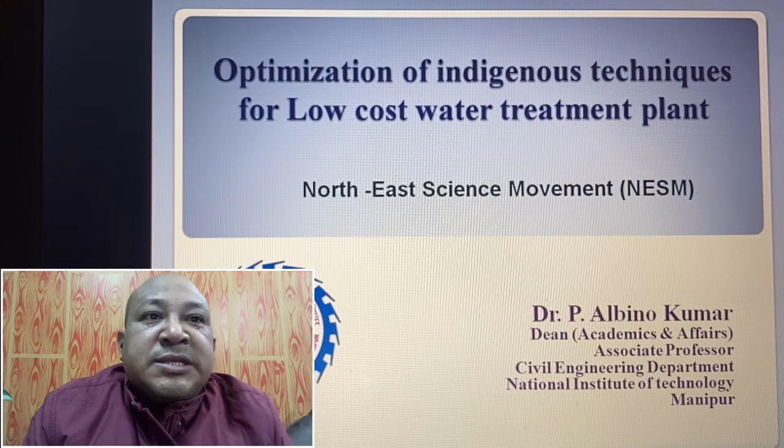To begin with, most of us know there is a water crisis throughout the globe. This water crisis can be defined in two ways. The first is when there is no water available at all, such as in deserts, or where rivers are completely contaminated or polluted. However, in some places a lot of water is available, but the water demand is more than the water available. That itself is also a water crisis situation.

As per the Niti Aayog report, more than 2 lakh Indians die every year due to non-access to clean water, causing a lot of health affecting issues.

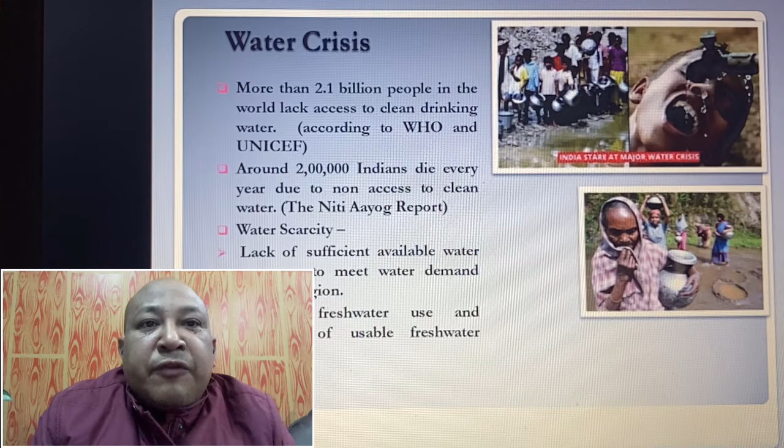Today we are going to start with what is the actual situation faced by villagers, even though many of us have come across this in real life. To make it precise, we see that the water crisis is especially due to the increase in water demand, particularly in rural areas.

In urban areas, water is always available commercially or some other way, maybe at a cost. Another factor is altered weather patterns, and then the lack of proper treatment facilities.

This is very important. In many towns and cities, there may be no space, but still proper water treatment plants exist, even though the efficiency may not be high. In rural areas, the construction of large cost water treatment plants is not very economical because the population is not very high.

So what we come across is that villages always depend on commercial water or sometimes on ponds and rivers. Sometimes, due to over exploitation of the pond, its recharging capacity decreases, and hence the pond becomes dead.

Plus there's pollution of ponds and rivers in villages, from cattle, cows and buffaloes taking baths, and due to improper sanitation like washing, drinking, bathing, and cleaning everything in the pond itself. So these are some of the issues that we've come across.

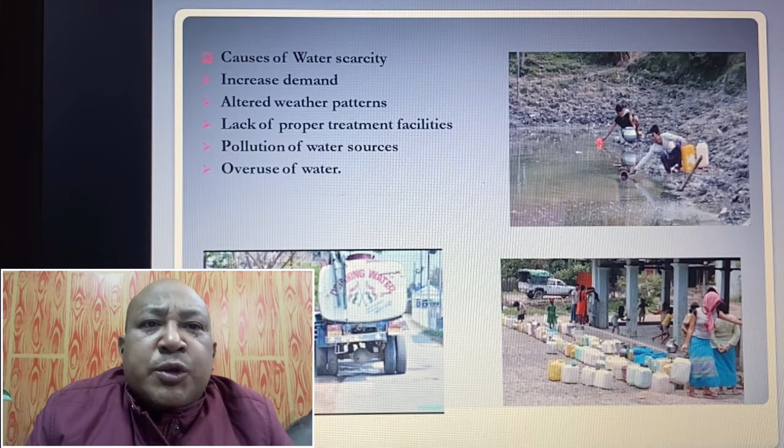In view of that, we are trying to identify some of the indigenous techniques used by our forefathers, and we are going to enhance them. We know that if impurity is there, it has to be filtered out, just like the filtration of tea leaves while preparing chai and coffee.

They used a lot of charcoal, a lot of sand particles, even though they may not have known what is better or what mechanism is going on inside, in terms of the science of physics.

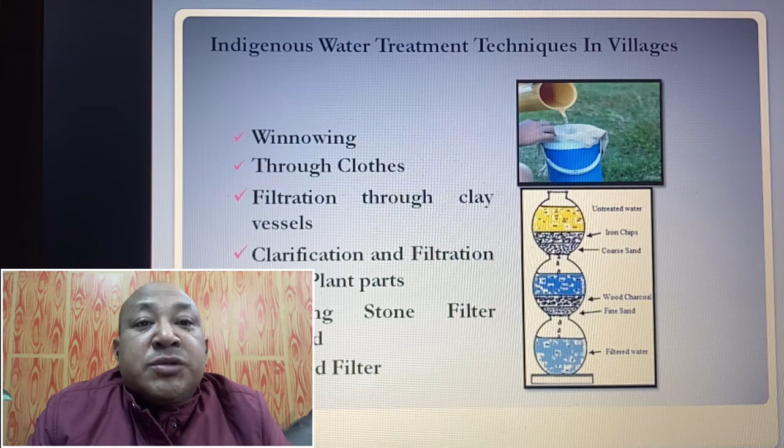So these techniques of filtration by sand, iron, filtering water through iron chips, coarse sand, wood particles - we are trying to understand the mechanism inside through available resources, and we are trying to implement this on a very large scale.

Now, most of us know that the sand filter itself is the most common technology applied everywhere for the treatment of water. That is what we call the biosand filter.

The mechanism itself has been applied using slow sand filters for treatment of water supply in many urban areas throughout the country and throughout the world.

Here, the main mechanism that lies is not only the filtration by the sand process itself, but there's also a provision called the biofilm that develops on top of the biosand filter.

For example, on top of the biosand filter, a layer develops automatically that takes around 10 to 15 days. We call it the dirty skin layer, or the schmutzdecke layer.

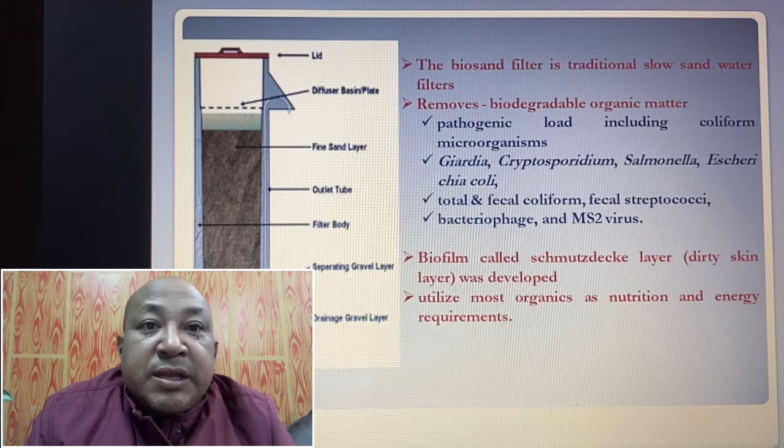So this layer itself contains a lot of microorganisms that fight the incoming pathogenic bacteria, which give a big contamination to our body system. Plus, it also feeds on small nutrients like iron, phosphate, and nitrate, which are common ingredients in the pond water, right? So to make it into bigger things, what we do is...

The mechanism that we define is, number one, in this biosand filter itself, the mechanical trapping. We are trying to identify the mechanism so that we can multiply it using science and technology concepts, and we can design it at a big scale. Mechanical trapping is simply the trapping of finer solids between the spaces and voids that lie between the sand particles. So when we design it, we optimize the size of the sand particle itself.

Then, as I explained before, there's predation of the pathogens by other microorganisms in the biofilm. Most of the pathogens are eaten by the microbes, which develop the layer themselves, and this has to be maintained consistently. Once it's dead, the collapse of the biofilm happens, and it takes another 15 days, which decreases the efficiency of the plant. So sometimes we have to maintain some standing water on top of this filter bed so that at least the longevity of the biofilm can be attained.

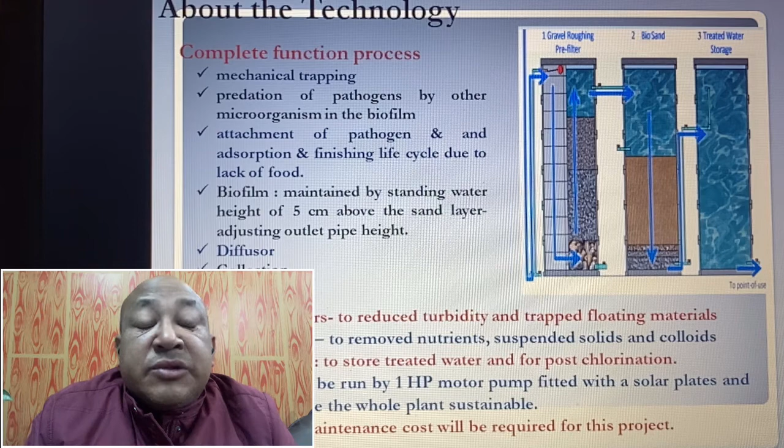Plus, another problem is when we feed the reactors, if we pour the water in by splashing or by container, that itself destroys the thin permeable membrane, the biofilm, which also acts as a filtration medium through its semi-permeable membrane by trapping the ions. So we have to add a diffuser, simply to decrease the discharge of the flow towards the filter.

So now, coming to my project work, in the state of Manipur itself, we have constructed a low-cost water treatment plant that I'll justify in the later presentation. Moreover, we also got a project from NECTAR, the North East Centre for Technology Application and Reach, which is a branch of the DST, for the construction of this plant.

Firstly, we surveyed and tried to identify places where the water was quite contaminated, plus places where water is available throughout the year. For example, after constructing the water treatment plant, if water is not available there throughout the year, the plant will collapse, and the next year's maintenance becomes an issue again—who is going to bear the cost.

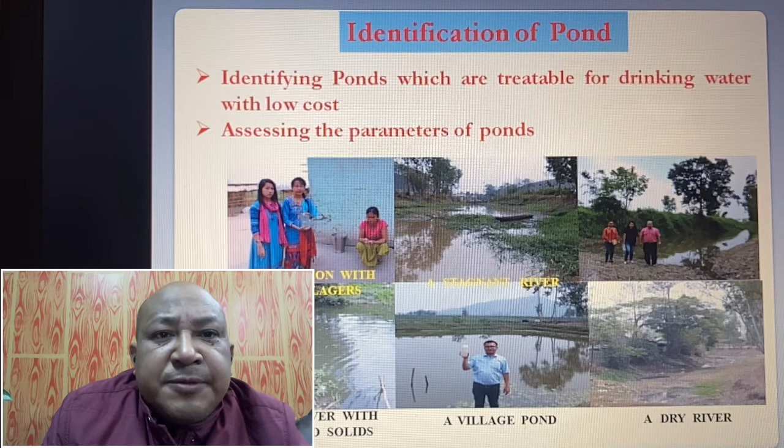So after several surveys of the health effects, the issues, and the nearby ponds, we identified the situation. What we found is that the villagers depend mostly on water from the local ponds, without further treatment. They treat it using indigenous techniques, but the question is how pure that water really is.

It may not have an acute effect, meaning it may not give an immediate effect. But in the long run, due to excess fluoride or excess iron, mottling of the teeth, skin lesions, discoloration of the skin—all these things come. That will be the chronic effect.

So turbid water with suspended particles is also quite common. The rivers are not perennial, and skin disease is an issue. Another thing I came across is that it's not that the villagers don't have any water treatment plant—they have a very decentralized water treatment system based on slow sand filters, using coagulants like alum to remove turbidity and chlorine for disinfection, for the whole water supply scheme.

But what happened is, for a sand filter to work, the development of this biofilm—we call it the schmutzdecke layer—is very important. Since they didn't run the plant continuously, unlike urban water treatment plants, once the plant doesn't run continuously, the food supply for the microbes maintaining the biofilm—which removes 98 to 99% of pathogens and biological parameters—gets impacted. So what happened is, they'd run the plant after 3 days, then after 4 days.

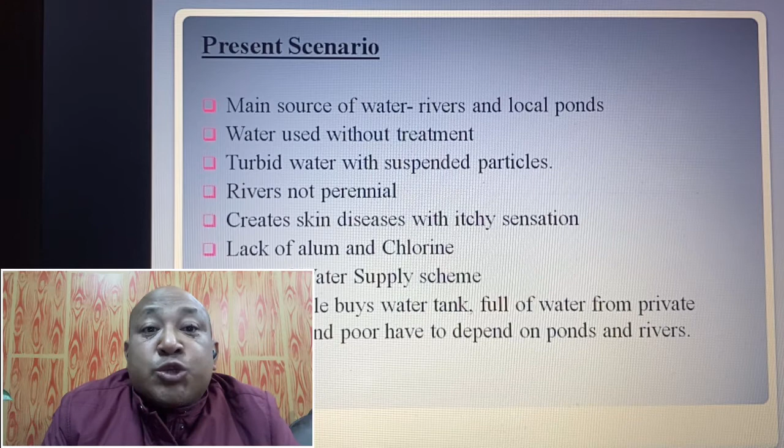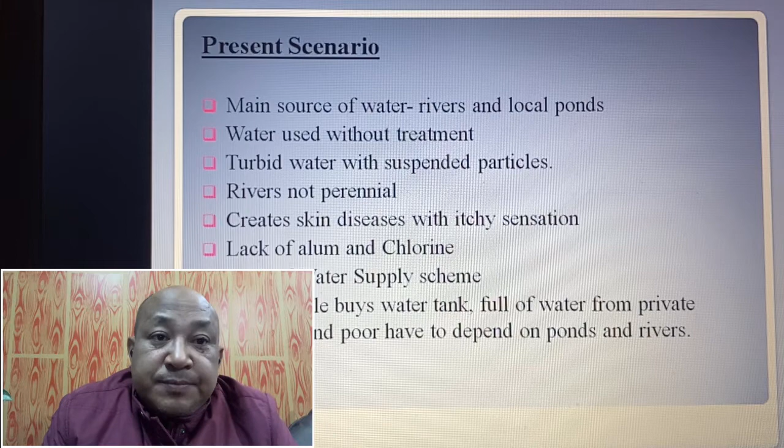So we are trying to make a plan to minimize this type of chemical consumption, like alum, because the sludge that comes out of the water treatment plant is going to contain the aluminium itself, and this sometimes affects the ground porosity and the ground's reproductivity for crops.

Taking all these things into account, I want to come to the project work and share it with my fellow members listening to this program. We designed a reactor that consists of roughing sand filters. The roughing sand filter is important because the reason we use chemical coagulants like alum and ferric chloride is to remove turbidity.

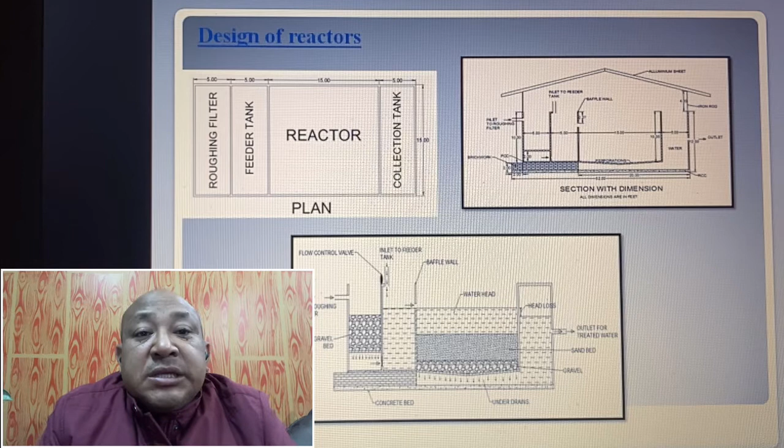So if the pond water has high turbidity, we try not to use that pond, and instead find another pond with less turbidity. However, for a turbidity of around 10 to 15 NTU, it can be reduced below 10 using these roughing filters, made of small pebbles of around 0.5 to 1 mm broken chips. It won't remove everything, but it reduces turbidity so that when it feeds into the feeder tank, the next reactor removes the remaining diluted turbidity along with nutrients, through the formation of biofilms, removing the pathogens.

Then finally, after the reactor, it comes to the collection. This is the front view and this is the side view. It's a simple basic concept: gravels laid at the bottom to collect the water, supported, and then a sand bed of around minimum 1 meter depth.

We also evaluated the depth of the sand bed. The reason is, if the thickness of the sand bed isn't high enough, incomplete filtration occurs. We also maintain the height of the water at not less than 1 meter. The reason is, if the water level is too low, the discharge from pumping water into this reactor will destroy the biofilms, which are very important for treating the ions and contaminants, the pathogens, through active microorganisms.

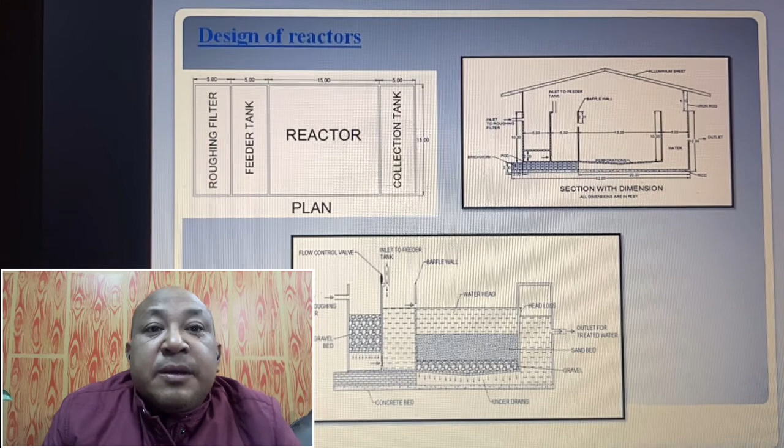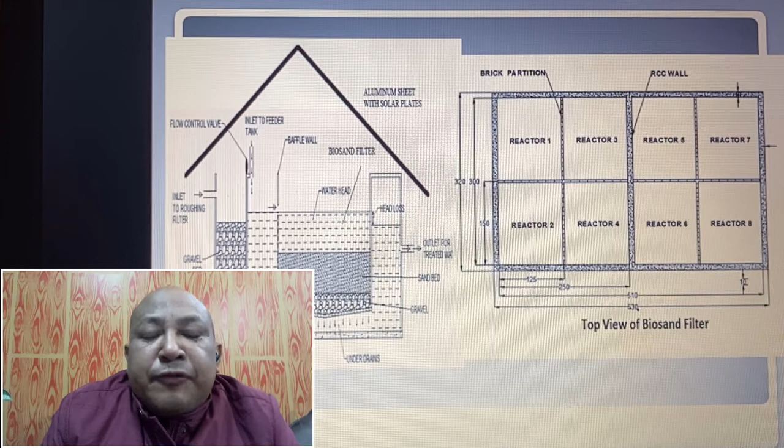On the right side, in the top view, we have 8 reactors. It's a single reactor, around 5.3 meters by 3.2 meters, but rather we make it into small fractions. From our research and project experience, if the diameter is quite huge, the risk of collapsing this semi-permeable biofilm layer is very high. We have to minimize it.

So what we do is decrease the diameter. But decreasing it too much impacts cleaning and maintenance of the reactor. However, it has an advantage: if one reactor fails, the remaining reactors can still function. The cross section of each reactor is around 1.25 to 1.5 meters, segregated by walls, but at the bottom they are connected by pipes so the water can be collected completely together.

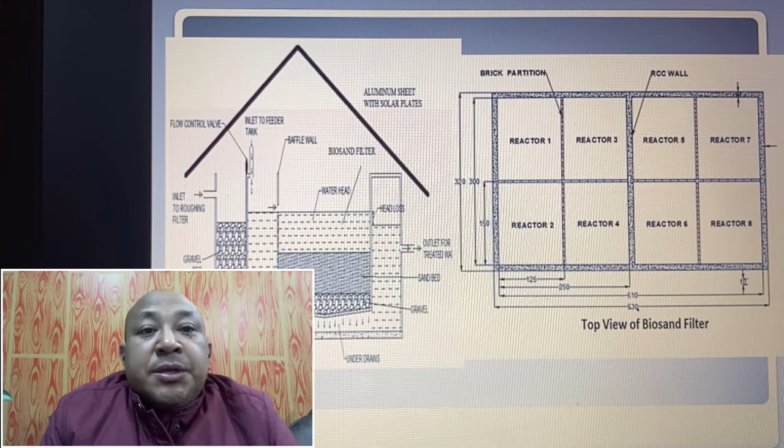And it's covered by this jali net along with the roof. It is not in any textbook, but it's trying to prevent rodents and bird droppings, which may contain some virus sometimes. So we have to prevent these things.

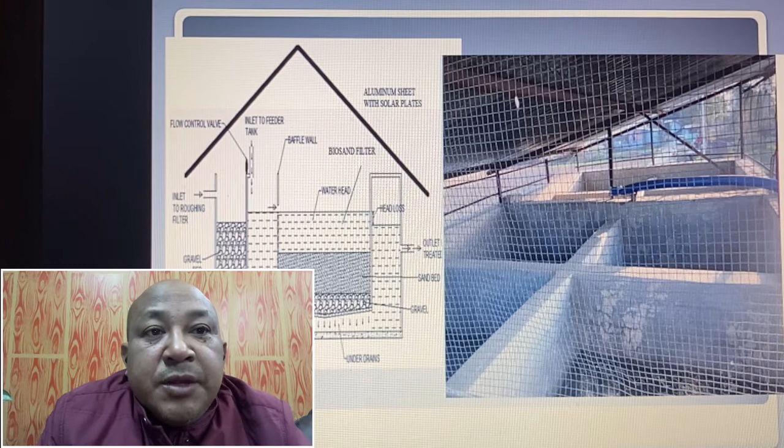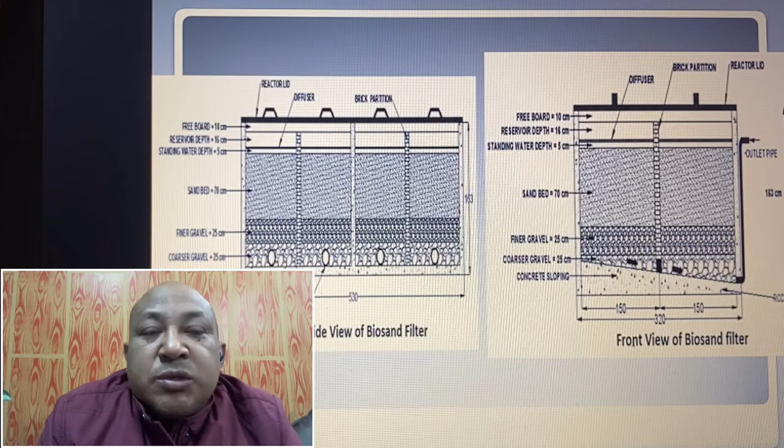So how it looks like in real life is going to be like this. You can see that there are 4 pipes, the 4 green pipes, and on the top, it is not that the water is coming from the top and going to the bottom. From the bottom part, the water is collected and it's coming up. It's coming up from all the 4 reactors and it's collected with the slope towards the reservoir.

So there is only treatment for removal of turbidity and then the biosand filter. So over here, what happened is, as I mentioned before, you can see that...

The top of the sand layer, we always have to maintain a minimum depth of 5 to 10 centimeters. But this water treatment plant is not going to be continuous. It's low cost. The villages are not going to depend on it 24 hours a day. It is going to run at least once every 48 to 50 hours, maybe once every 2 days, alternate days. So to maintain the life of this biofilm, we have to maintain a particular depth so that even without food, or with a limited amount of available food, the microbes can sustain or survive for another 48 to 50 hours.

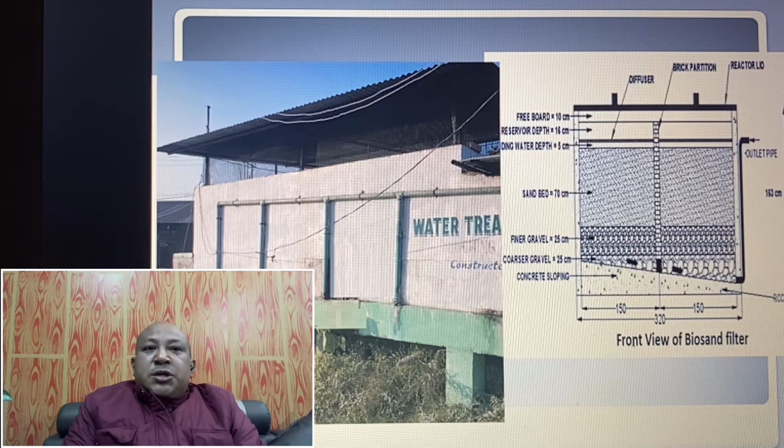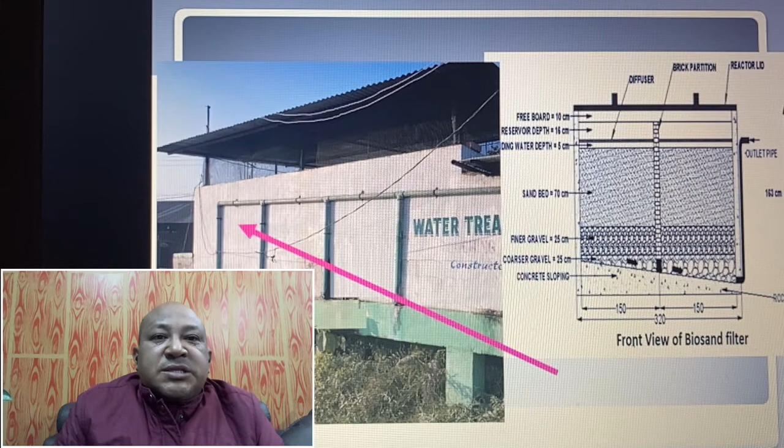So some water is maintained. How do we maintain it? You can see that the outlet is there, and then it goes out by raising the hydraulic head. These green pipes are increasing the hydraulic head of the water. So whatever water is coming from the bottom is going to come up again, it's going to go to the outlet, and the depth of the reactor may be up to this point. So what happens is, even if the plant is stopped, at least 5 to 10 centimeters of hydraulic head will be maintained, which we call standing water, to maintain the life of the microbes.

So same thing, the cross section, how we laid out all the things over here, I'm showing it.

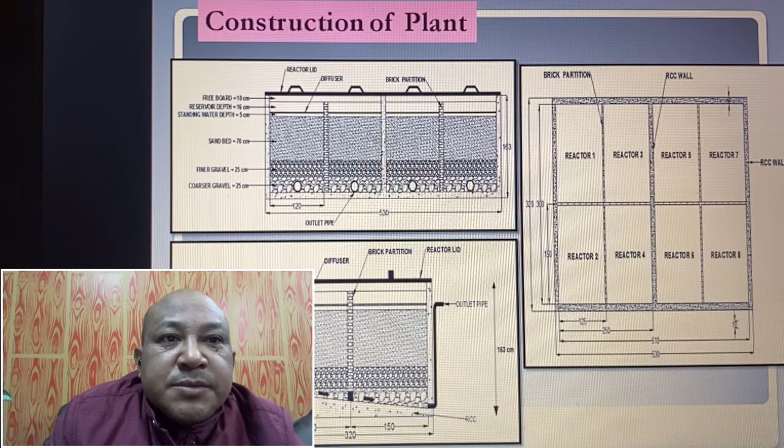Now, this is the constructional phase. The reason I'm putting these photographs is to convince you that this presentation is not just about taking some biosand filter and treating it. It's about how we make it practically possible, not on a very large scale, but medium to mid scale and very low cost. Why low cost? Because there will be no maintenance, no operational cost at all. It is only the initial construction cost.

So my staff are monitoring how to make it, because this is not actually designed in any textbook the way it's built at a large scale for biosand filters. So we are doing careful cross-checking to make sure nothing goes wrong even during construction.

Initially we had to collect the water through a Sintex tank water reservoir. Then in the future we realized it's not economical, since the plant itself can treat water consistently. So the quantity of water depends on the reservoir that's maintained. If the reservoir is huge, the villagers can depend on it for 2 days. If the reservoir is just, say, 1000 liters, then the plant has to run every alternate hours.

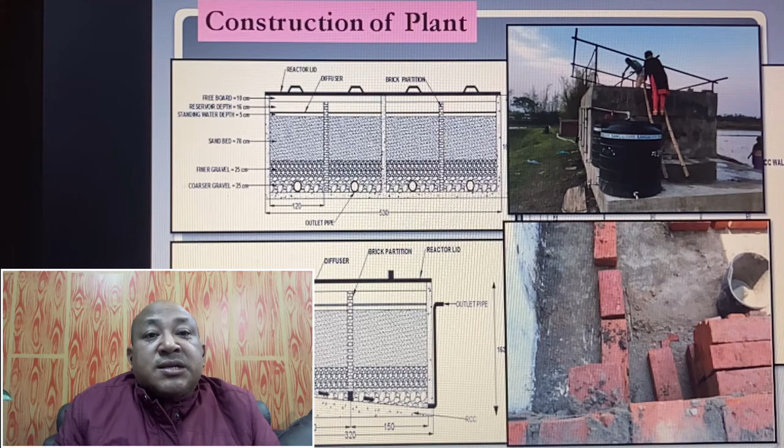So it's not like we completely followed a textbook, we also did research. There were laboratory scales involved too, like optimizing the sand particle size, optimizing the depth of the reactors, and optimizing the discharge so that we maintain proper biofilms. From this experiment itself, we realized that the Sintex tank was not going to serve the purpose, so we started constructing a higher reservoir, which was not previously planned. Now, this is the actual picture.

On the left side, you can see the pond that we have selected. This is in a place called Nambol in Imphal, Manipur. This pond itself, we studied for a long time.

We have a bargain with the villagers that this should not be contaminated, that they should also take responsibility, because if we make it everything free, sometimes it goes wrong. People take it for granted. The value of this water treatment plant, for people deprived throughout their lives, generations without drinking water, when they get it easily, they may destroy it. It's just like a very spoiled son. So we have to make them responsible also.

So it's not that once the water is treated, we integrate and just make it simple. You can see something written here in Manipuri language. It says if people are using the water for washing or cleaning, they're going to pay fines. They shouldn't misuse the water. Some things are written by the club so that we take hand in hand responsibility.

Once it is over, it's not simply that we finish the work. It's also very important for us to monitor, because this is something to play with the health of the human beings of the villages. We don't want to take everything for granted.

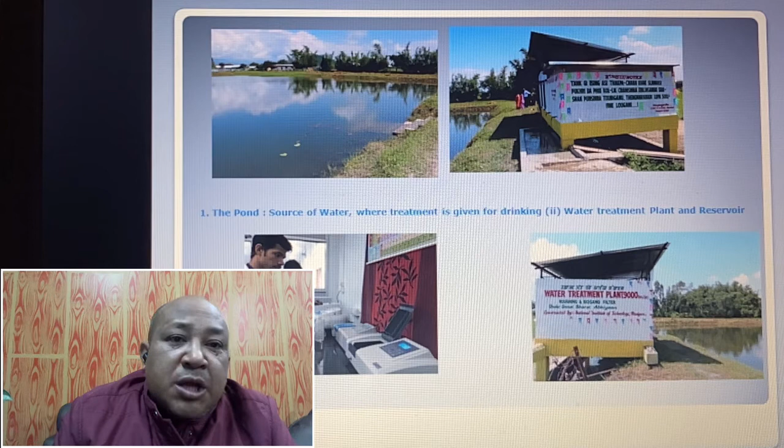With my BTech students, MTech students, PhD students, we keep on studying these things, and the monitoring was done not only in the laboratory but through survey mode also. Through the survey mode, we keep on discussing with the villagers.

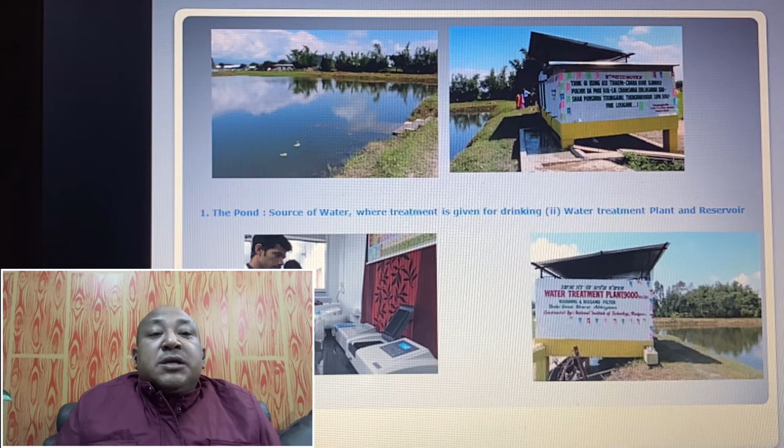We discussed the health effect with the villagers, took medical people to check regularly, showing them we are committed to their health, with constant monitoring especially with children drinking this water continuously for cooking or washing. There were no cases of vomiting, diarrhea, or dysentery. So this water is scientifically proven, and psychologically we treated the villagers too, and they happily accept our water treatment plant with a big embrace.

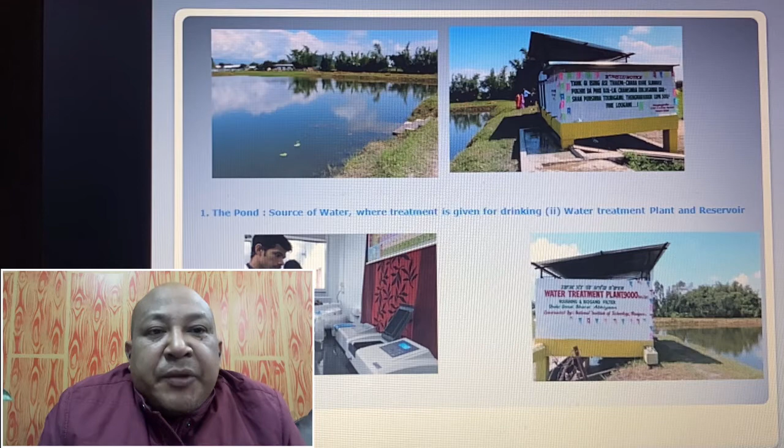Now the next thing is, you can see why I'm showing so many photographs, this is not about a fluke or just downloading Google pictures. We are sharing how we applied an indigenous technique, how we enhanced it through our engineering skills, how we implemented it, and how we overcame so many things that are not in our textbooks, rather than just publishing papers and conference proceedings for our promotions.

So here, in order to run the plant, you can see on the left side we put some solar pumps, the solar plates, to run a 1 horsepower motor pump. In the days to come, the pump itself will be owned by the villagers. Since no electricity is purchased from the government, it is completely self-sustainable. No cleaning has been done for the last 5 years.

But something very unusual happened. The pump was not able to run, and we observed that the battery was gone. Even the solar battery cell theft occurs. These are the things we learn from the real field. Finally, we also blame the villagers for not being able to protect it, but we don't blame them in a way that makes them feel reprimanded.

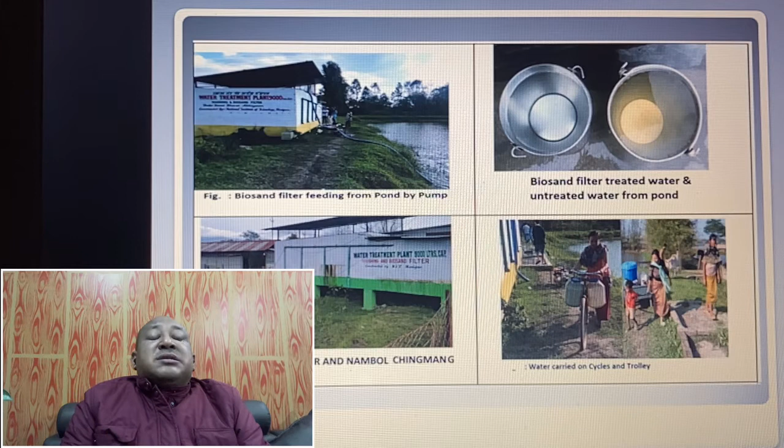The happiness about this is, even though we've come across a lot of advertisements on TV with ambassadors from sports stars to film stars, every reverse osmosis system we purchase, we pay them money too. My point is, do we really have to spend so much money over there?

Because simple water is the purest water, where all the parameters are below the permissible limit. Then when they say in the reverse osmosis advertisement, 'Shudh Paani, Mitha Paani,' do you think water should be sweet? The real water should not be sweet.

So sometimes I joke to the villagers that if you want it sweet, just drop a pinch of sugar in this bucket, then this will be Mitha Paani. It's just a joke. My concept is trying to remove all those illogical things.

So you can see the villagers taking water from here. This reactor at the bottom, the top one is the first reactor I constructed. The second one is at the second place. This is very near Manipur, where the Indian National Army Memorial and the Japanese Memorial are located, the place where the Japanese fought a war in World War II. Very near that location is this water treatment plant.

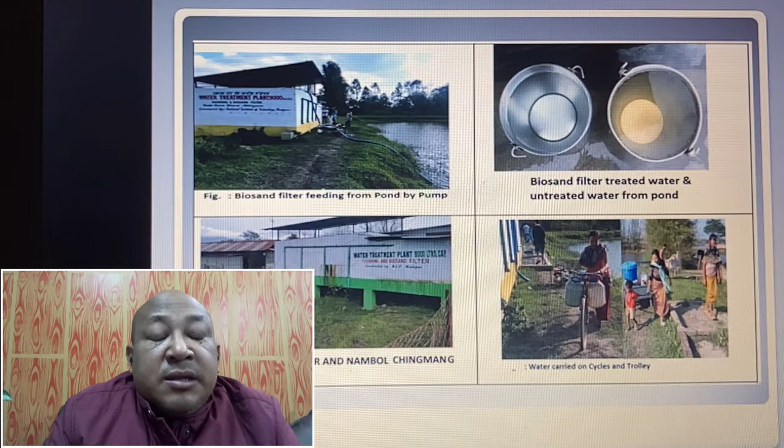Next, when I say 'low cost water treatment plant,' let me explain how much it actually is low cost. In a place like Manipur, a 20-liter water bottle costs around 50 rupees, even though the MRP may be 40 rupees, or the actual industry cost may differ, we don't know. But laymen pay almost 40 to 50 rupees per 20 liters for drinking water.

This plant cost around 7.54 lakhs, including all GST, contractor fees, their profit, and all the proper government protocols for constructing the project. But if villagers build it themselves, it will cost much less. So with this 7.54 lakh investment, you can purchase 3 lakh liters of water.

If we run this plant treating 9,000 liters every day, it can treat even more. Even expecting just 9,000 liters, which is the capacity of the reservoir we maintain here, and running it for the last 5 years without further treatment, this 7 lakhs can be recovered in 33 days. That means in 33 days, the cost of constructing this water plant is completely recovered, compared to purchasing from water bottles. So it's completely free after 1 month.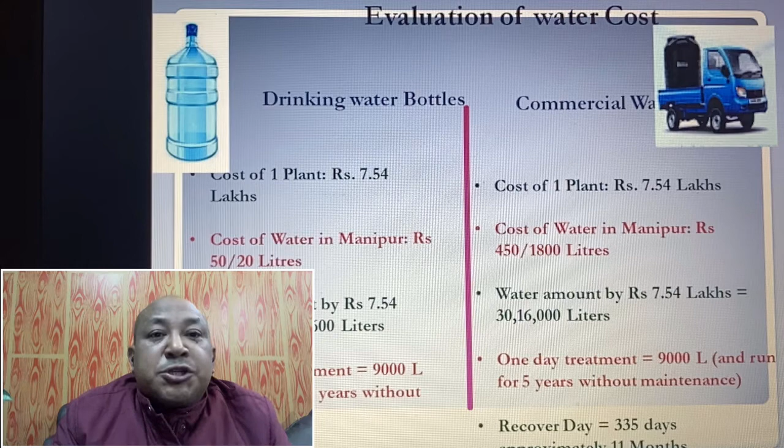Now the next important part is what I'd like to share from my experience creating awareness among the villagers. As I told you, cattle and human intervention has to be prevented from the pond, not allowed for bathing. If you want to take a bath, take the water out, and the club has to look after that very properly.

The mechanism of the reactor was explained to the villagers properly. Otherwise, they would just think you put some sand and it gets treated. No, we are applying engineering skills, we are intervening and intercepting it. We design the depth, the grain size of the sand particles by sieving it. At least more than 90% should be the desired size particle we design for.

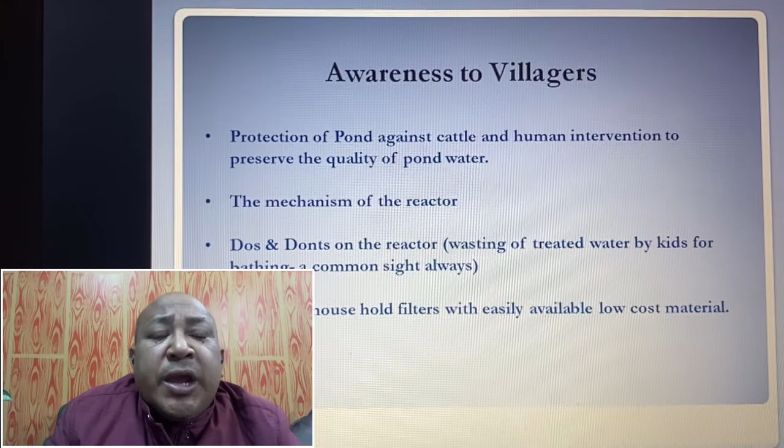And the do's and don'ts about wasting water by the kids, it should go hand in hand with what we teach and what should be practiced in the field with the villagers. So these are some of the presentations I give to the villagers to build their trust.

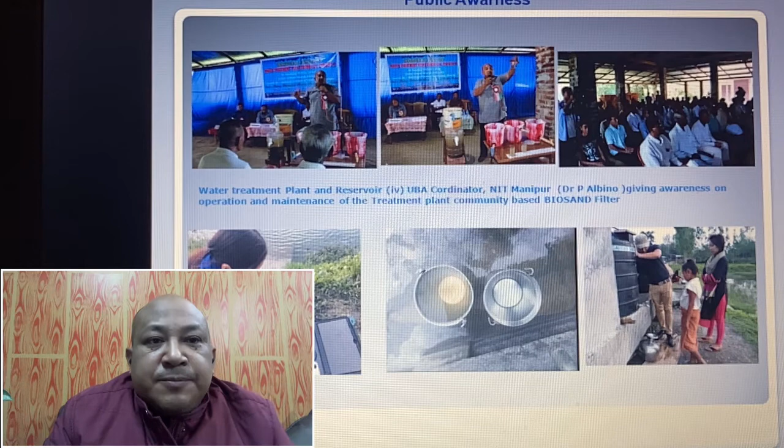What I feel is that just doing research in the lab, especially in the Northeast, making a lot of good publications accepted by the US and European countries, chasing promotions for a high impact factor, rather we are making a brain drain, but we forget to implement it actually in our own field. Through this project, I'd like to open up the scope to show it's not only about promotion or our own benefit, but it's very peaceful and satisfying for these villagers who are getting free water, the purest water ever in their life in this village. This is my target.

You can see the smile on the women's faces. They're carrying the water, bringing a very small lorry. The club restricts them from carrying it by vehicles, otherwise they'll misuse it, so that if they take the toil and hardship to carry the water this way, they will use the water very economically and very wisely. Even this practice itself we have never come across in our textbooks.

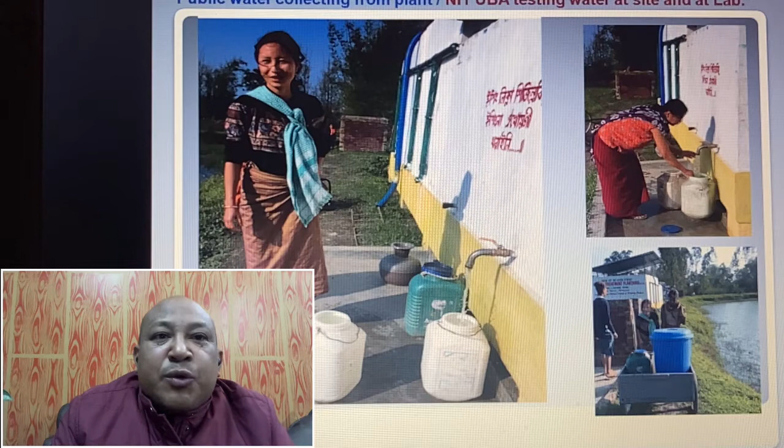These are the experiences I would like to share, and this is how much happiness we get when all these villagers stand in a queue at particular intervals of time set by the club to collect drinking water. In fact, we also get municipality water at my home, sometimes reverse osmosis, and then we treat it by filter, but sometimes we forget to boil it. But here, pathogenic bacteria are completely killed by these biofilms. So the satisfaction of giving this drinking water, seeing the long-standing queue, knowing their burden is minimized to get good drinking water without any cost.

With this completely low-cost water treatment plant, I would like to thank all my listeners, urging us to at least enhance our skills not only in papers and publications, but also to implement them in our fields. With this, Dr. Albino here from NIT Manipur, I'd like to thank all my listeners of this Northeast Science Moment. Thank you.